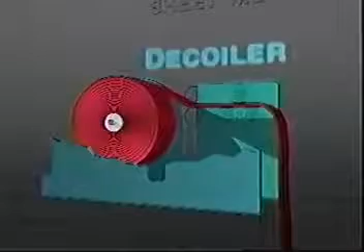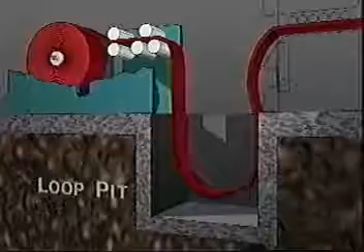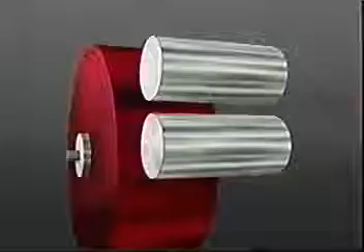A steel metal coil is installed on the sheet metal decoiling equipment by placing it on a mandrel. The gripping action of the coil puller rolls unwinds the sheet metal off the coil. The steel then travels between the straightening rollers. These rollers are slightly offset to bend the metal in the opposite direction from which the coil is wound, taking out the curvature of the sheet caused by the coiling process.

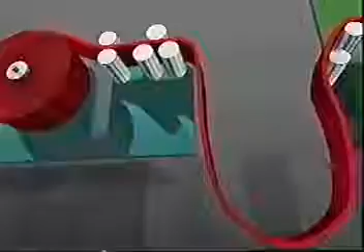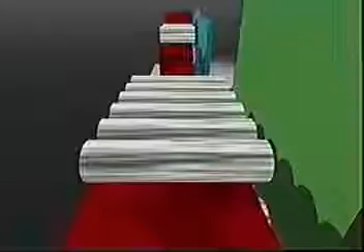The sheet metal coil next drops down into an opening in the floor called a slack loop pit. A series of feed rollers pushes the exact amount of sheet metal required for the blank size into the blanking die. The slack pit allows the feed rolls to work with the least resistance. Otherwise, the coil feeder would be pulling against the action of the decoiler puller rolls, thus reducing the accuracy of the coil feed equipment.

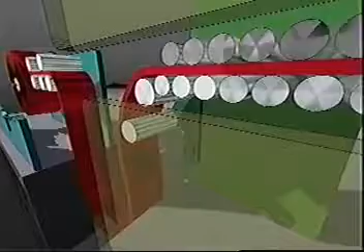Now this sheet metal is ready to be made into blanks. Let's put names to the components of the blanking die and then see how it works.

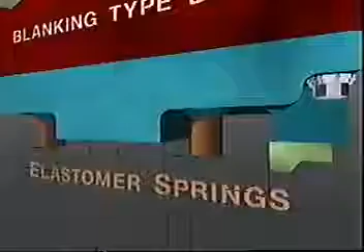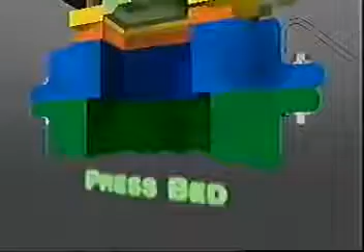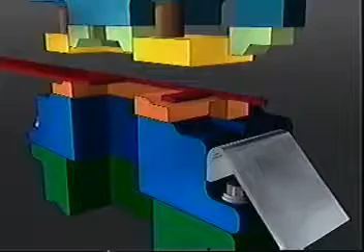The coil feeder feeds the sheet metal into the open blanking die. The sheet metal rests on the lower blanking steels. As the die closes, driven down by the ram of the press, the upper spring pad makes the first contact against the sheet metal. The pad serves the function of holding the metal securely, while the die blanking steels cut out the blank from the coil.

Notice the pad is held against the coil steel by springs, which compress as the die closes. The compressed springs provide enough pressure to keep the steel from shifting while cutting is taking place. Scrap cutters are in place at the rear of the die to cut off the ribbon of scrap left on the coil after the blank has been cut out. These smaller, more manageable pieces are collected, then discarded into the plant's scrap collection system.

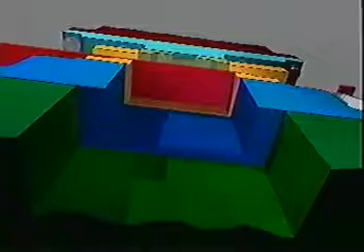At the bottom of the press stroke, the upper blanking steels have completely cut out the blank. The blank then sheds through an opening in the die and press bed, and is eventually dropped into a pallet or gondola. Then the blanks are stacked, banded, and shipped to the appropriate press line for the forming die operations.